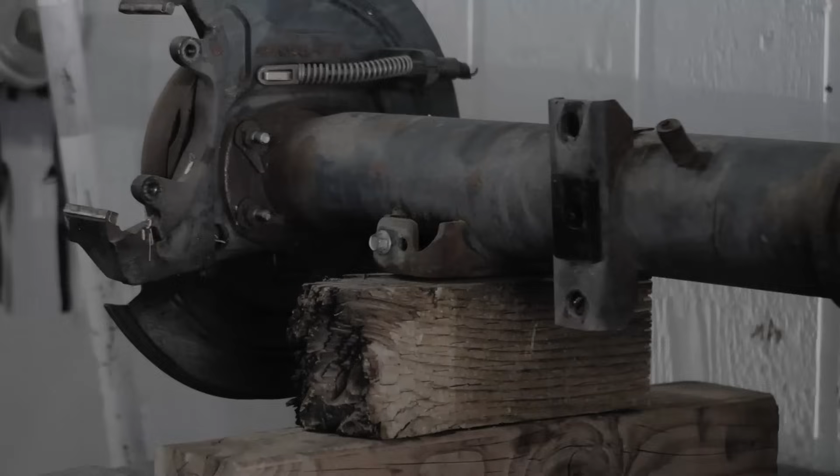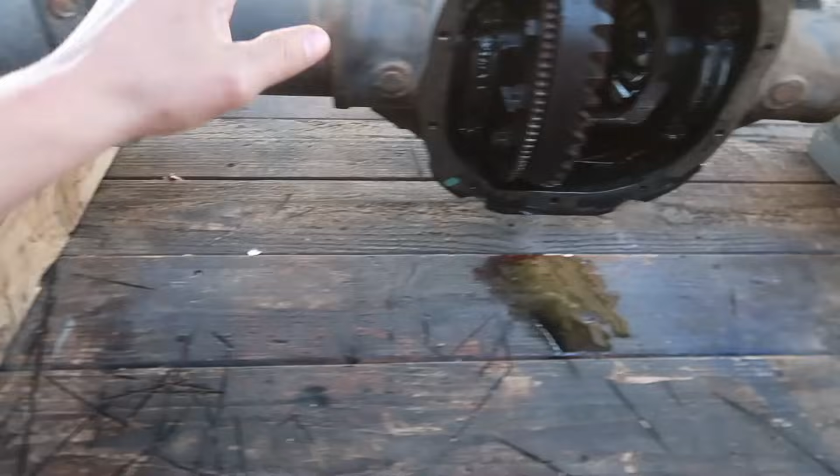Today we're gonna be picking right back up on my Ford 8.8 rear end. We're gonna be actually cutting and shortening this thing today. To start off though, we need to cut everything off of this thing. All of the spring perches and the mounting points for the sway bar, all this stuff has to come off. But before I do anything, I wanna kind of clean this thing up really quick and then we'll get started.

I got this thing as cleaned up as I'm gonna get it for the time being. This thing's gonna get cleaned probably multiple times.

Before we get started, I want to mention that this is my first time ever doing something like this. I've never done ring and pinion work, or taken the internals of one of these out or installed them. I do know that there's shims involved and you have to check clearances, put paint on the teeth, spin it and check the engagement and the amount of engagement. There's a lot involved. That's something I've never done before.

So for that reason, I am going to be leaving all of this assembled. Of course, if you are doing this to your rear axle and watching this video to learn something from me, and you're confident enough in removing this and knowing you'd be able to put it back in properly, then you can do so. Because I feel like that would probably be the best thing to do, is to just get all this stuff out of the way, since we have a lot of cutting, grinding, and welding to do.

And of course, you are gonna get debris and fragments of metal inside of the axle tubes and everything, and that's gonna have to be cleaned out after we're done. To get all these moving parts out of the way would be better, but me personally, I don't wanna open up a can of worms that I'm not gonna be able to get myself out of, you know what I'm saying? So I'm gonna leave all that in there, but I will most certainly be cleaning this thing once again, inside and out, once we're all done, because I wanna get all the crap out of the inside, and we're also gonna paint it.

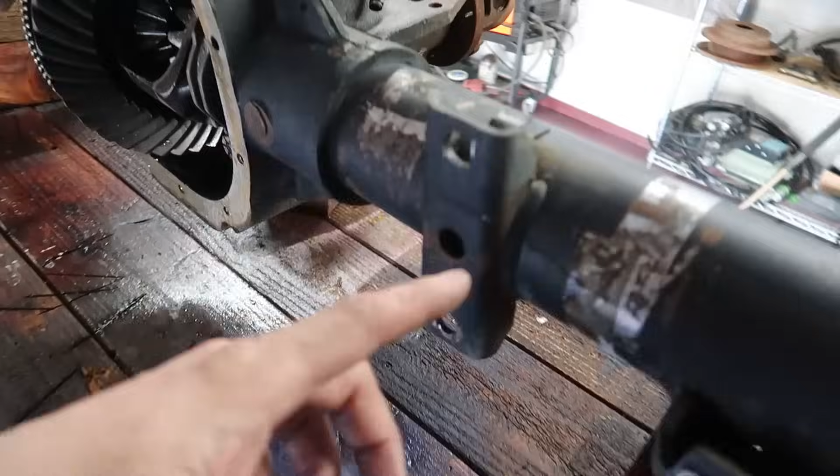So with that disclaimer, moving on, what we need to do is actually cut everything off of these axle tubes. The spring perches need to go, and these mounts right here where the stock sway bar bolted up need to go. I am going to leave these little tabs for the brake lines because I'd like to reuse those.

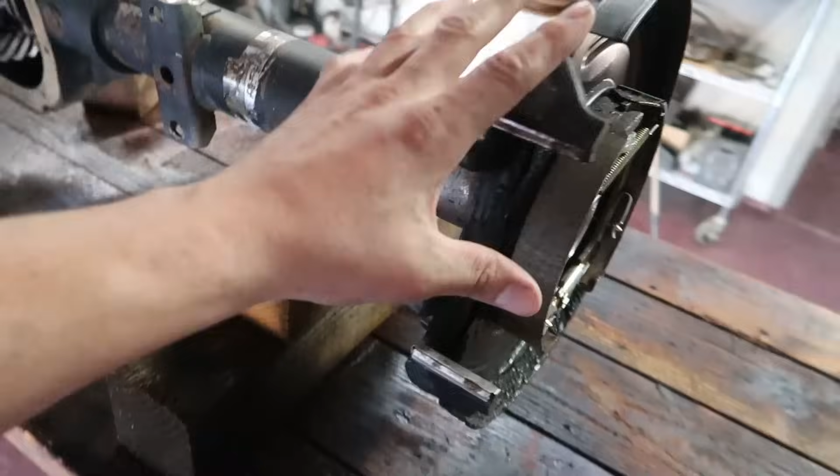First, we're gonna go ahead and unbolt this stuff and get it out of our way. I left it on there for the pressure washing, so it got clean too. But now I can go ahead and get that stuff out of the way.

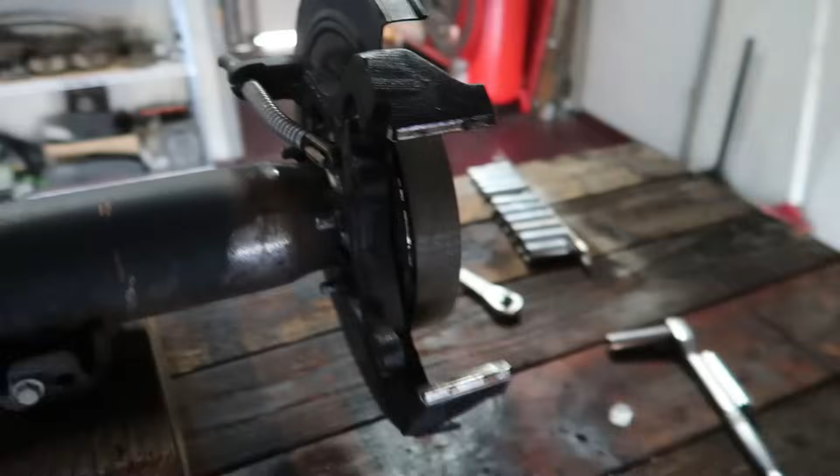So this is the driver's side. I am gonna go ahead and mark this stuff so later it saves me a little bit of confusion. I'm sure it'd be easy to figure out, but later on, instead of trying to figure it out, I just know passenger side, driver's side. It's as easy as marking it.

So these things, it looks to me like they're through bolted. There's 4 bolts right here. There's a head on this side, and then there's a nut on this side.

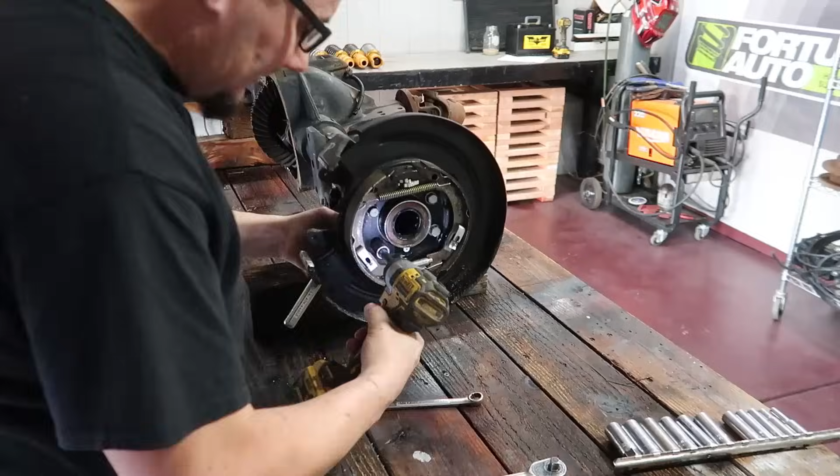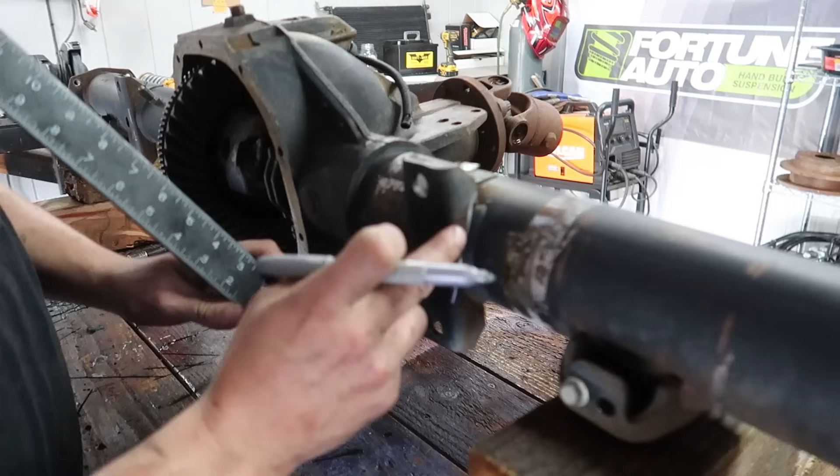When it comes to cutting these brackets off, obviously our cutting wheel cannot cut in a circle. So what I'm gonna be doing is just making a bunch of straight cuts, basically in a V. I'm gonna try my hardest to stay away from the axle tube itself, because we don't wanna create dips in it or cut into it. We just wanna take these brackets off. Once we get the majority of this bulk cut away, I can come back and whatever's left, along with the weld, I can just grind down with a flap disc and get it all nice and smooth. However you get these off, the most important part is just to keep your cutoff wheel out of your axle tube.

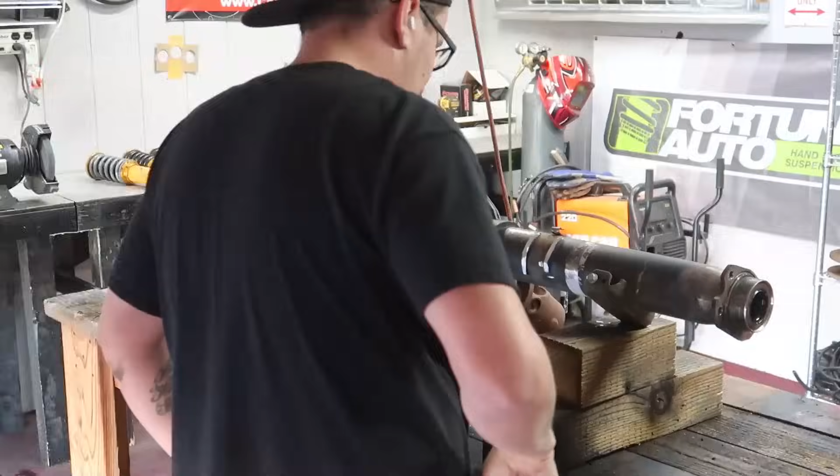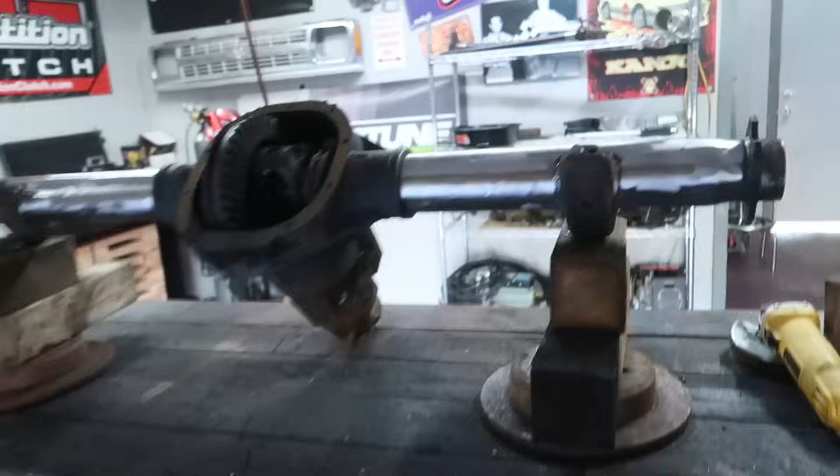Good Lord, man. My whole garage is completely filled with grinding dust already, and that was only 2 of the 4 brackets. We're halfway done. Sway bar brackets are cut off.

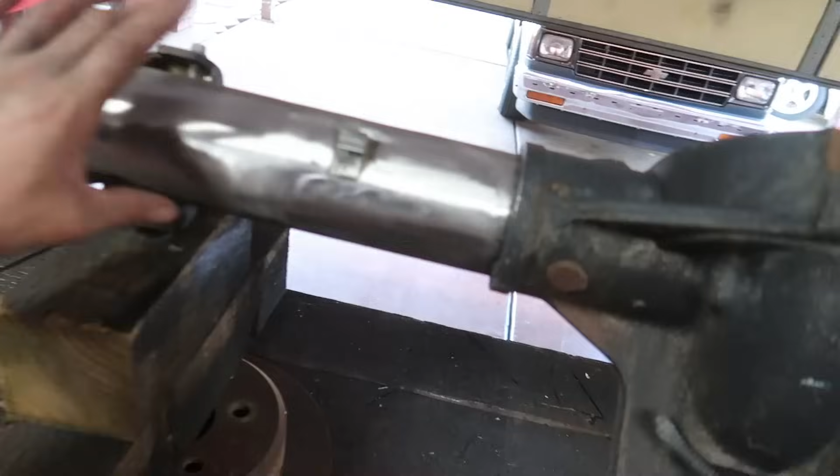I went ahead and ground the excess metal all the way down to where it's smooth and stripped all the paint off. I did everywhere that I can see with the axle in this position, front and back. So got all the paint and everything off because we are gonna need a weld on this. We need to strip all that down.

So now I need to go ahead and roll this thing over the other way and do the exact same thing with our axle, and then just finish getting all this paint ground off, and we can move on to the next step.

Finally got us a whiteboard for the damn garage so I can stop drawing little pictures on pieces of paper. This thing was 10 bucks at Walmart.

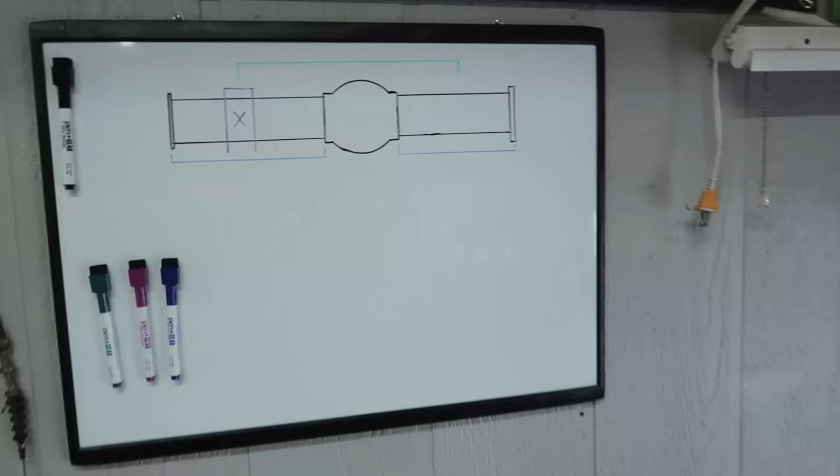Anyhow, I went ahead and I drew a rear housing up here, and these are all the measurements that we need to figure out. So the blue line, this purple right here, and then the green - I separated everything in different colors, bro. Trying to stay organized around here.

What can I say? So we need to find the measurement of the short tube versus the long tube so we can find out how much we have to cut out.

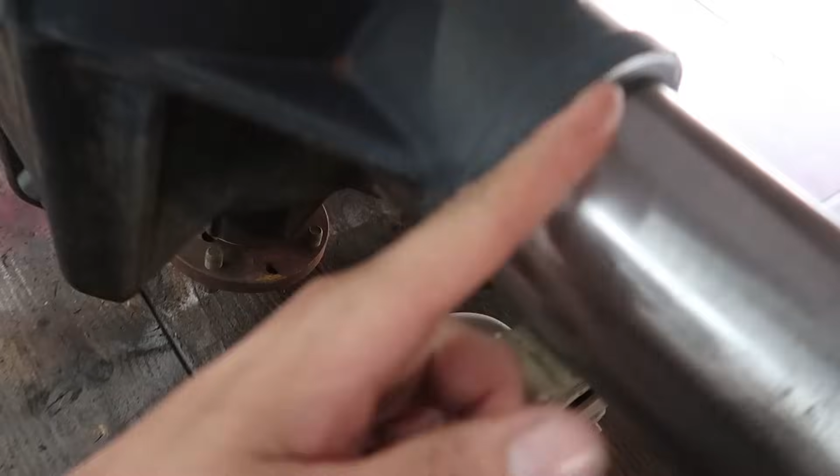And whenever I measure this, I'm gonna be going from this lip right here of the differential housing, from here to the outside lip of this. So this area right here is actually machined flat because this is where your brakes and everything all bolts up. So this front side of this is actually machined.

The back side of it isn't necessarily machined. So it is a possibility that if you pull your measurements from this housing over to here, they could be slightly off from one side to the other. So you want to measure off the machined surface for sure.

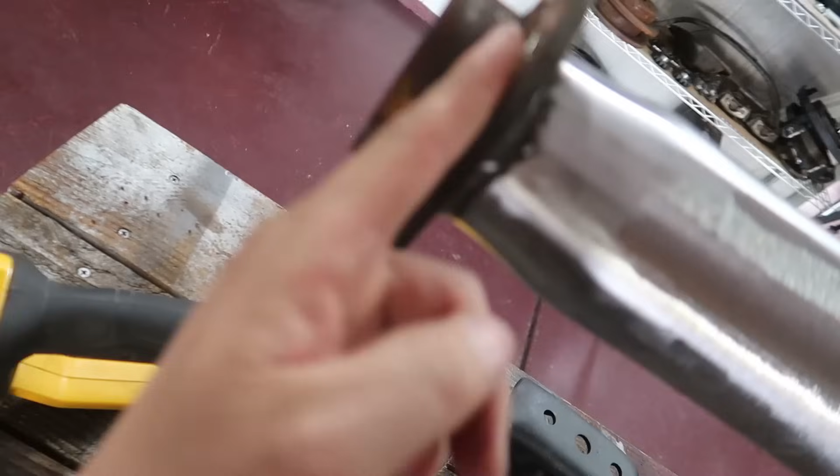We got to pull a measurement of the short side and a measurement of the long side. Subtract the measurement of the short side from the long side, and what we have remaining, that is our measurement in which we have to actually cut out of the long side. So once we figure out these two measurements, subtract them, we will get the measurement that we need to cut out. Now the position of where it is we are going to cut is going to depend on this measurement up here.

So this green line right here is going to represent the spring perch. And in order to get that measurement, I'm gonna have to pull it off of the axle that is actually on the Blazer. We have to find out where our spring perches are going to have to mount in order to match with the Blazer, because this is going into the Blazer.

We want our leaf springs to line up, right? So stay with me, pay attention. I'm gonna do a really quick crude drawing just to kind of represent what it is I'm trying to explain.

So whenever we cut our long tube and take a section out, right? Once we cut that section out, then we gotta bump the two together and then re-weld it back together. So basically, once we do so, they're gonna be bumped up to one another like this.

We want to find where our spring perch is gonna be centered on the axle tube so that we are capable of welding our spring perch to where that weld of the axle tube is going to be in the center. And if it's not obvious, the reason why we're gonna do that is for strength.

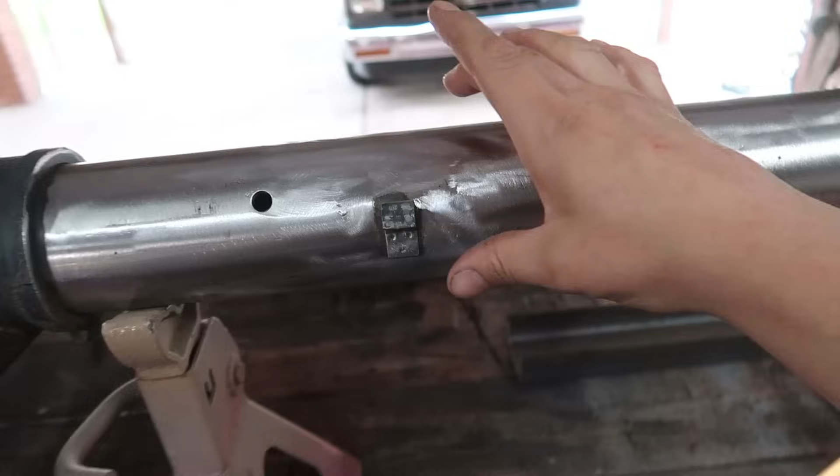So whenever I cut this tube and I weld the two pieces together, I'm gonna have a weld going across here. And then if I take my axle perch and put it centered over the top of that, then we have to weld this in, and then our axle perch will be welding on each side of it, just adding a little bit of strength, adding a little bit of rigidity to the section that we welded together.

Measuring the short side, butting up against the differential housing to this outside machined edge: 17 3/8. And I'm gonna check it in a few different spots just to make sure.

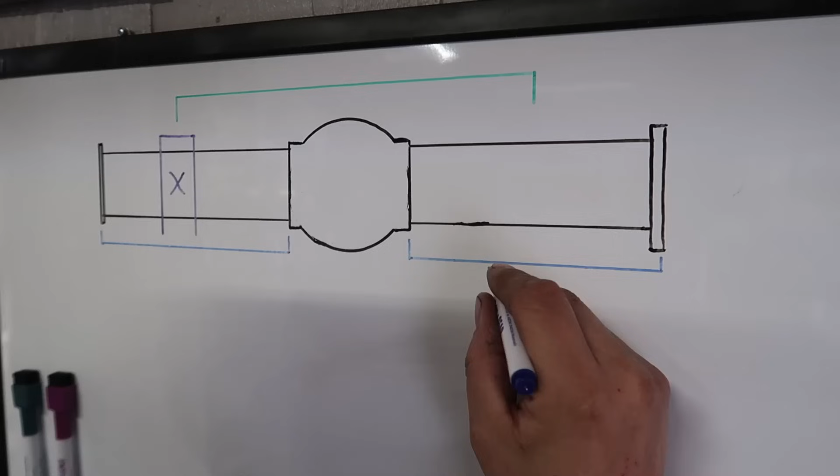All right, same thing on the long side. Measure from the machine edge right here of the differential housing to this outside edge is 20 1/4, and I'm gonna check in a few spots. Yep.

So the amount that we need to cut out is the long tube minus the short tube, which is 2 7/8 of an inch. That is the amount that we need to cut out of the long tube.

So now we know how much we gotta cut out, but we don't know exactly where we gotta cut it. And that's where I gotta go and get underneath the damn Blazer and figure that one out.

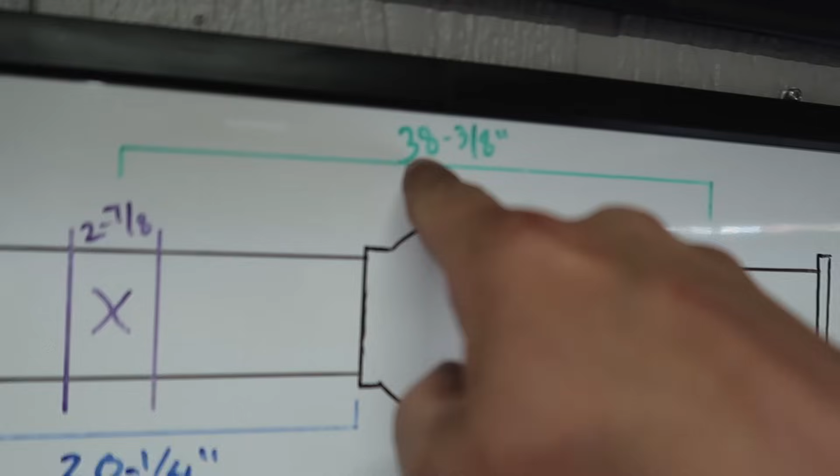38 3/8 of an inch. Just to explain, I'm trying to be as informative as I can, so if any of you are wanting to do this yourself, or just watching to get some ideas. This measurement, the 38 3/8 of an inch, is the measurement of my spring perches that are on the axle currently on the Blazer.

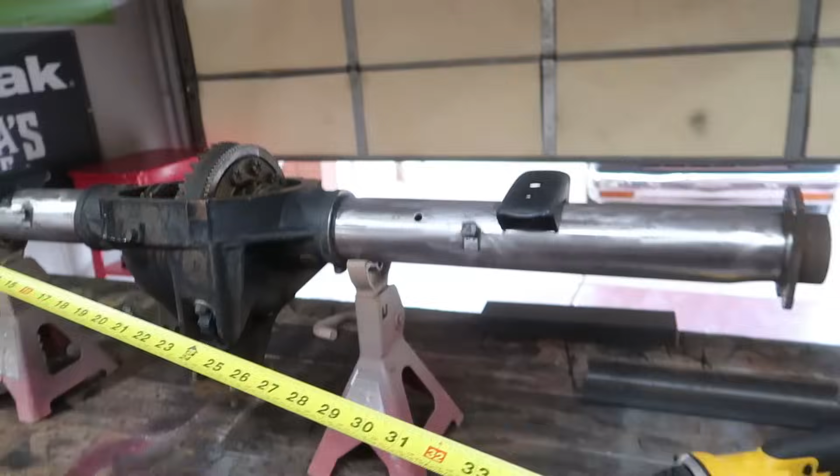That is from one spring perch to the other, center to center. Currently I cannot get a dead on measurement, so that's a rough measurement. You can't measure something with a big old hump right in the center, you know what I mean? But since that axle is still installed on the Blazer, I was able to pull my measurement off the leaf spring, which had been further out like this.

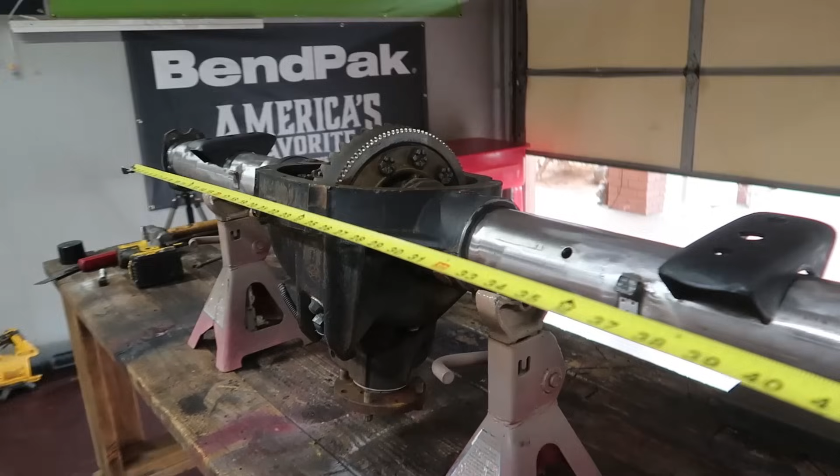So that is not an exact measurement, exact enough to know exactly where to weld my new spring perches on the 8.8 axle. So I will need to remeasure that whenever we actually take that axle out of the Blazer. We'll get a more precise measurement before we weld these on, but that's good enough for figuring out exactly where to place my cut.

Meaning if I am off a little bit from center to center, my weld might not be dead on in the center of my spring perch. It might be 1/4 of an inch this way or that way, but either way our weld will be in the middle of our spring perch, whether it's perfectly centered or not.

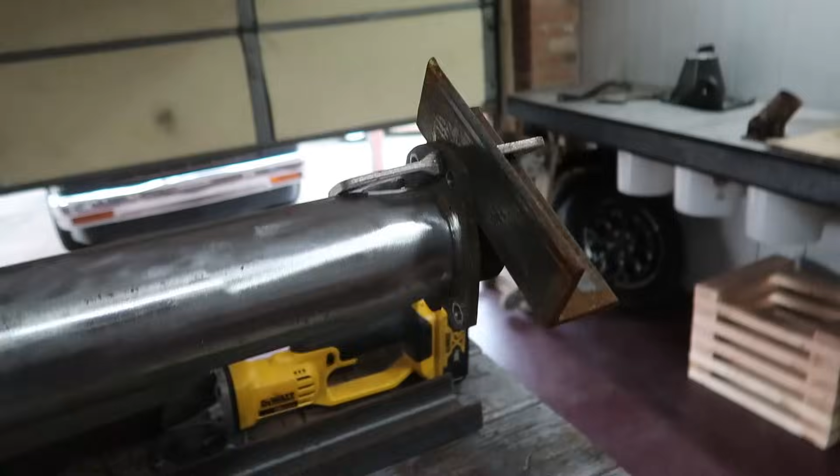But now we need to figure out exactly where 38 3/8 of an inch lands on the axle. So I need to know an overall measurement of the axle the way it is right now. So I clamped some angle iron onto our flat machine surfaces on the end caps, so I can pull a measurement a little further out and get away from the center diff.

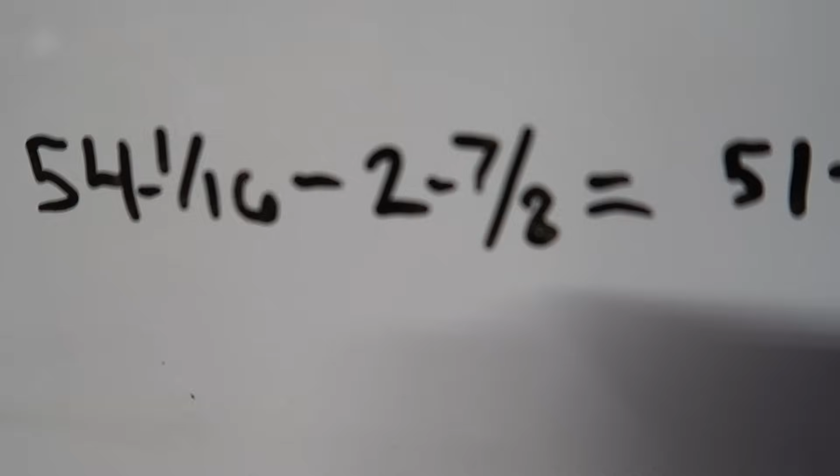The overall width of our axle right now is 54 inches and 1/16. I'm not gonna worry about that 1/16 too terribly much, but we know that we have to take 2 7/8 of an inch out of this. So this measurement is gonna get 2 7/8 of an inch shorter than what it is now. Our overall length right now is 54 1/16.

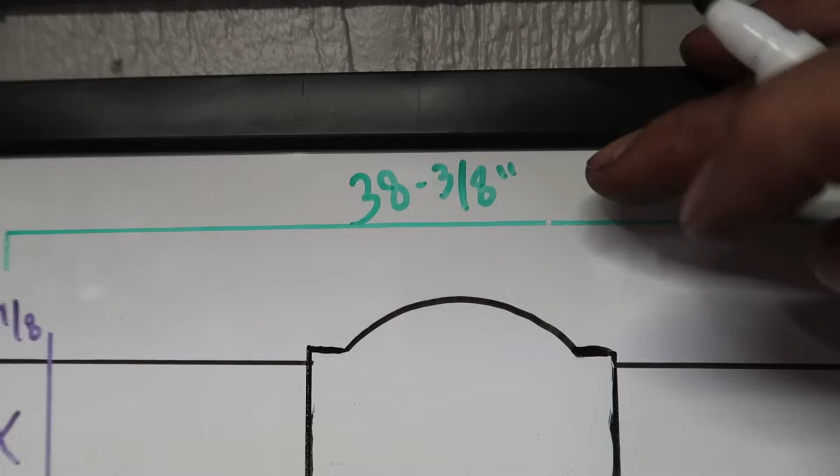We gotta take 2 7/8 out of it, which will leave our overall length 51 3/16. Bring that 51 3/16 down, minus the 38 3/8, which is the overall span of our spring perches. 38 3/8 equals 12 13/16. So of the axle's overall length, the axle itself from this end to this end, minus the overall length of our spring perches, is the 12 13/16.

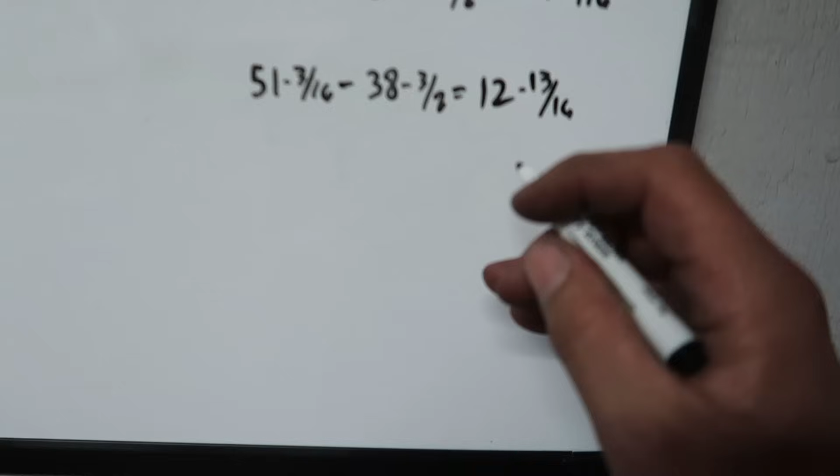So 12 13/16 is what we're left with. Now we gotta cut that number in half. I know, it's a lot of math. So what we're left with is the 12 13/16. That divided by 2 is going to leave us with 6 13/32nds, bro. Yeah, that's a wild number, right?

So now I can simply go over there to the axle, measure from this edge over 6 13/32nds of an inch, and that is the center of our spring perch, or where we make our first line where we have to cut. So I went around the axle tube and marked many different points, like 5 or 6 different points right at 6 13/32nds, to make sure I have a reference point going all the way around, because this is actually our cut line.

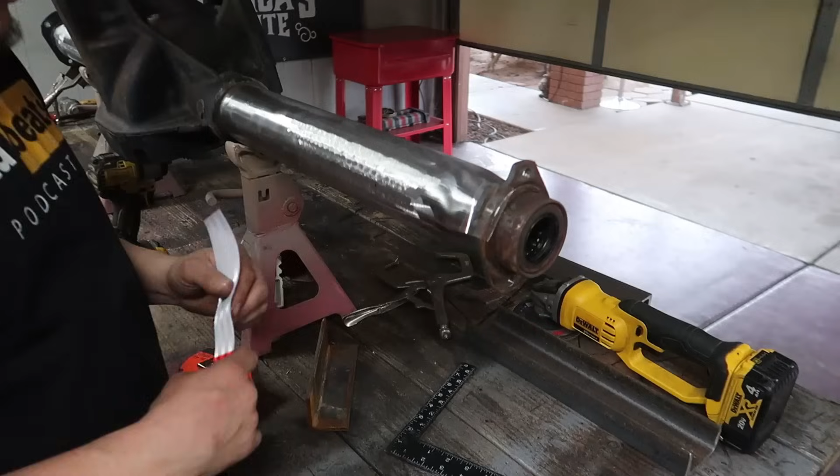So now what I'm doing, this is a reflective sticker for a trailer, man, it's really thick. I'm gonna wrap it around the tube, and you gotta make sure your edges line up so you know this thing is square going around the tube, and then you know you have a nice straight line going around. But I also made multiple marks so I can go around and check that I'm hitting all my marks.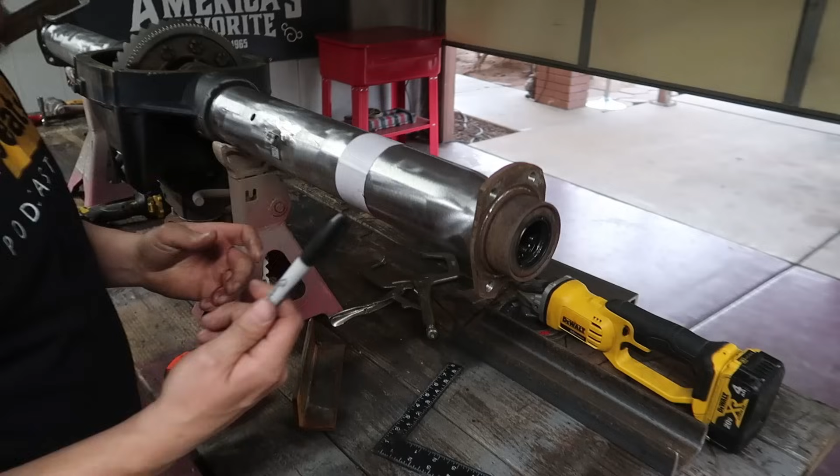On the freaking money there, boy! Every single one of our marks are lining up. So now I'm just gonna go ahead and drag my Sharpie around that edge, leaving our cut line, and I know it's nice and straight and square, and it is 6 7/32 away from this flat surface right here.

So now we got our first cut line marked. I'm gonna go ahead and slide this thing over. Since I already have this thing all squared up with the pipe, I'm just gonna slide it over here out of my way. We need to make our second mark and do the exact same thing, which is just gonna be the 2 7/8 of an inch over from the first mark.

So there's both of our cut lines, bro. That is exactly 2 7/8 right there that we need to cut out. And when we do, and we butt this section up to this section, weld them together, that will also roughly be the center of where we need to weld our spring perch on.

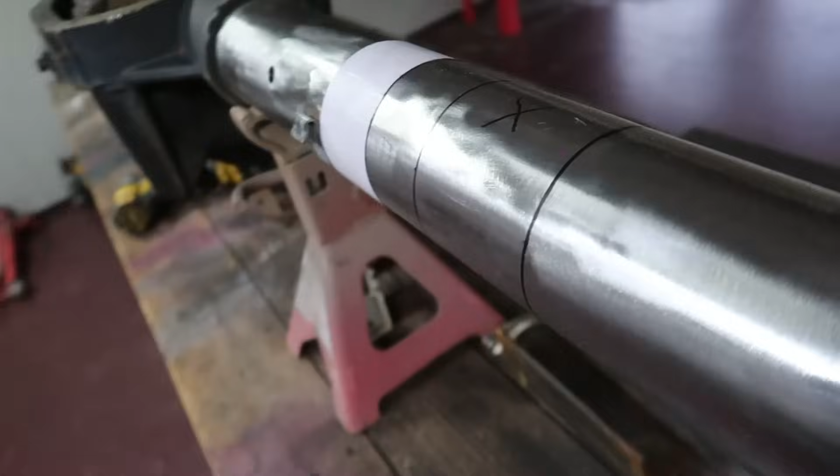So now I'm gonna go ahead and pull a bunch of measurements, dude. I'm gonna measure this at least 2 more times, double checking the lines before I do any cutting. Because the thing is, if I screw this up, if I make this too short, then it's screwed up, and basically the whole thing is just trash. I mean, I could try to get the plug welds out and everything and try to replace the entire tube, but you get what I'm saying. I don't want to screw up.

Wait! Before we do any cutting, we need to actually give ourselves a clocking reference. So I need to put a line across here so I know which way to clock this thing whenever we weld it back on.

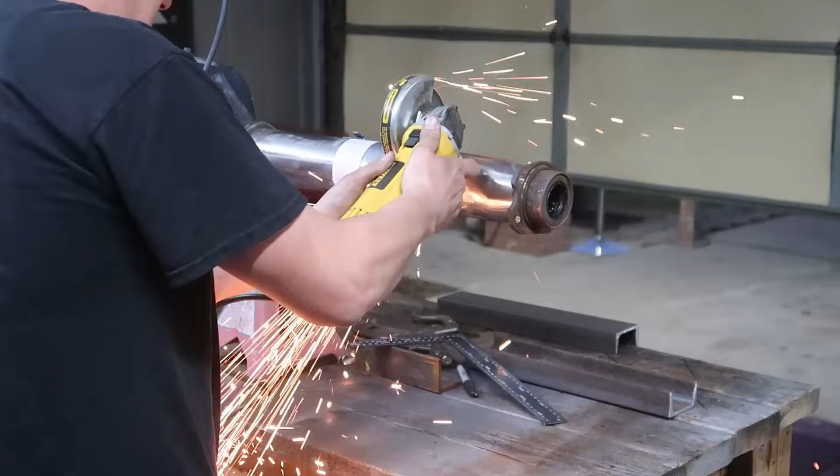First cut done, one more cut to go. Dude, the inside of this is disgusting, bro. Got a lot of cleaning before we're gonna be able to do any kind of welding.

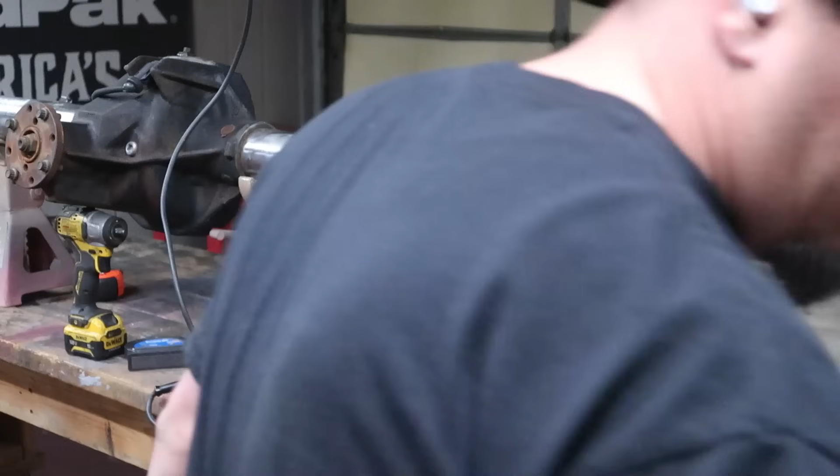What I got here is 3-inch C-channel, and they are 14 inches long in length. This is what we are going to be using to square the pipe up before we weld it together.

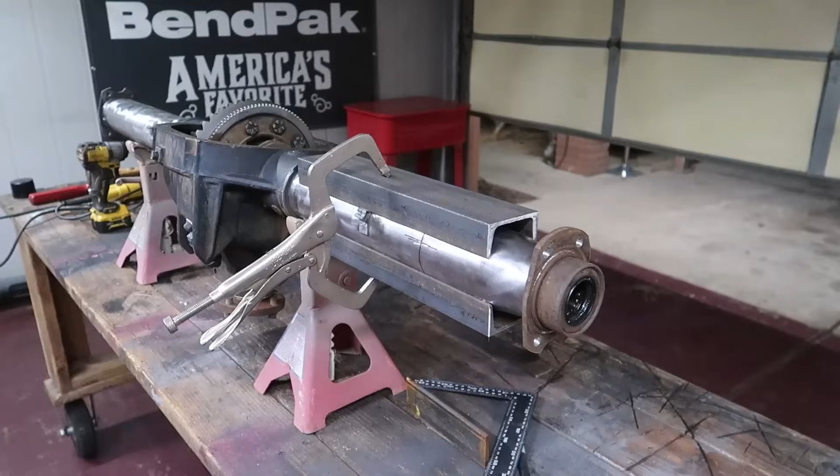Shoo! Shoo! Shoo! Dude, that is so freaking dope, man. This is actually really exciting for me. This is my first time ever doing something like this to this extent, you know? Like, I don't know, it might seem really simple to most people, but it is a pretty big undertaking, man.

And to accomplish something like this, now of course we're still not done. The most important thing I would imagine is probably making sure that I don't weld some camber or something into my rear end. Make sure it's nice and straight, but I don't know. I'm just taking my time, one little step at a time, bro.

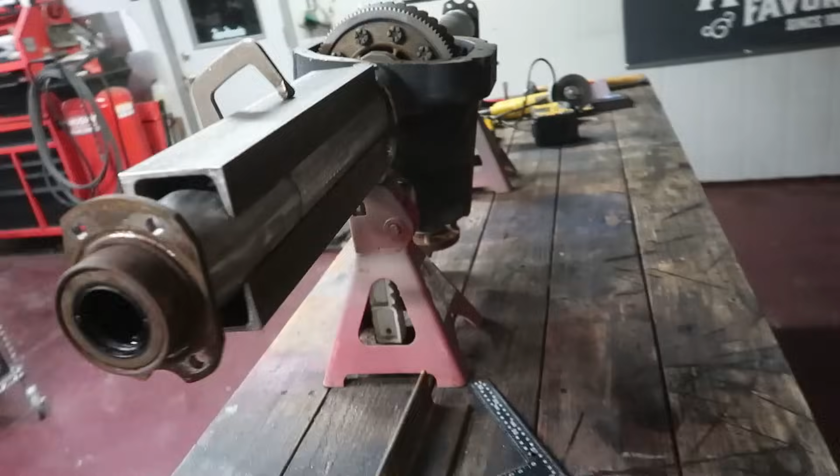I've done tons of research on this to try to make sure to the best of my ability that this is gonna come out right. But I just kind of wanted to mock it up there and just get a visual of how it looks. I measured it and it is roughly in the neighborhood where we need to be at 17 3/8 to match that side. Of course, we do have to clean the cut up a little bit.

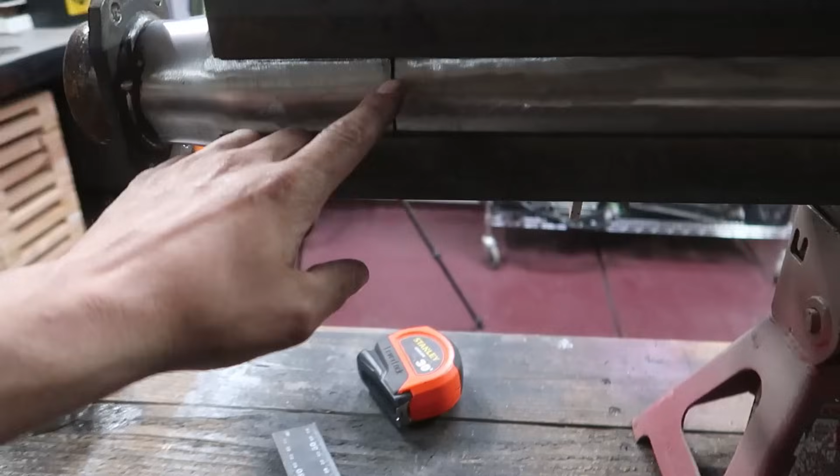I followed that line extremely straight as I could. We need to clean it up a little bit, make sure to get it flush, bevel that edge.

But first things first is, dude, the inside of this tube is ridiculously dirty. Like, this thing is caked up. So we're most certainly gonna have to get that clean before we can do any kind of welding on this for sure. And I want to do it before we start beveling the edge because I don't want my grinder to just start contaminating the whole thing with grease.

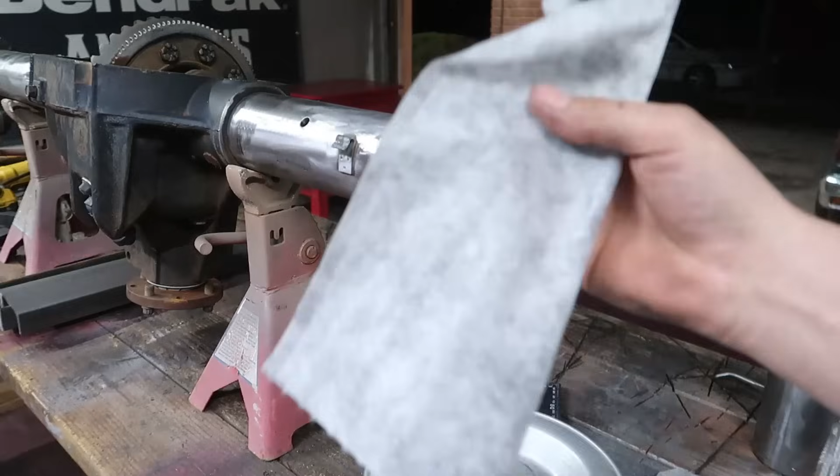So, man, I gotta be honest with you guys, I'm not really wanting to pressure wash this thing all out and get all crazy with it again right freaking now. So I'm just gonna try my best to get this thing cleaned up by hand. I'm taking a bunch of my Gojo wipes right here. Okay, just gonna kind of fluff them up. This is gonna be my beginning stages of getting this clean.

And I have a set of really long, they're not needle nose - I honestly don't know what these are called, but anyhow, I'm just gonna clamp on to all my Gojo wipes. That's my little swab. We're gonna swab it. Maybe do some spin action while we do so.

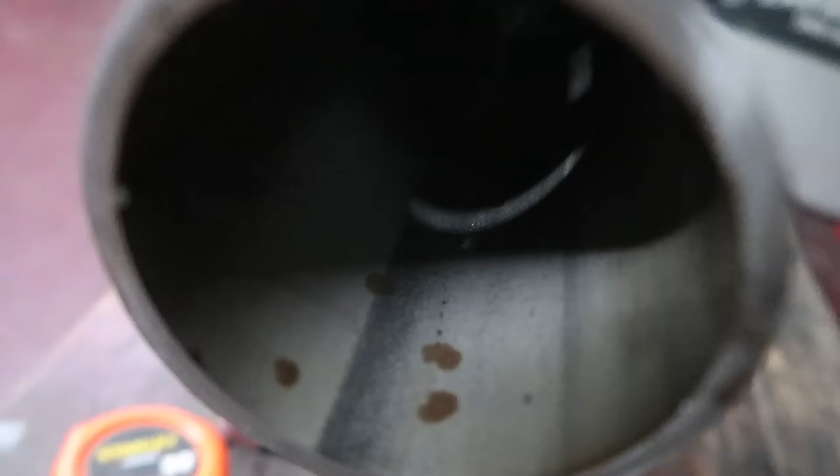Dude, good freaking Lord, man. Freaking look at that. Holy crap. I still have some more cleaning to do, but I'm just surprised.

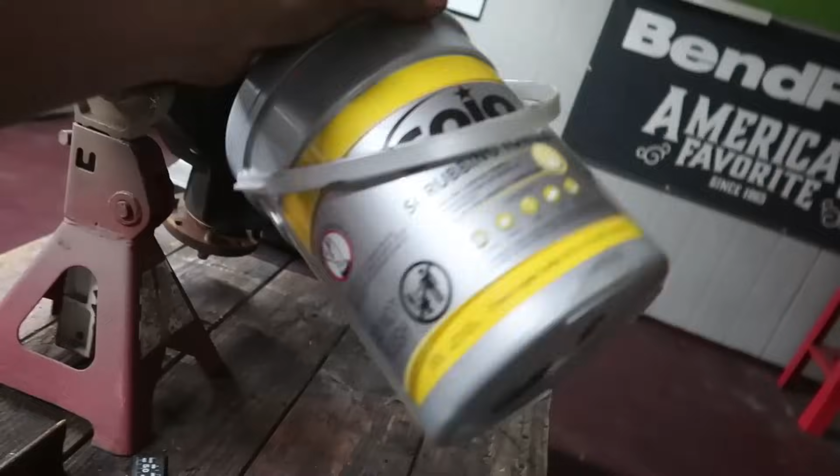That's all the way down to the bare metal. I can't tell you guys enough, if you don't have a tub of these in your garage, you definitely need to get them. Carry them with you to the junkyard or whatever, because these things definitely kick ass. I'm gonna do this once with this round, grab some clean ones and do it one more time, then get a rag of some sort and do the exact same thing with some acetone a couple of times, till we get this thing really, really freaking clean and ready for welding.

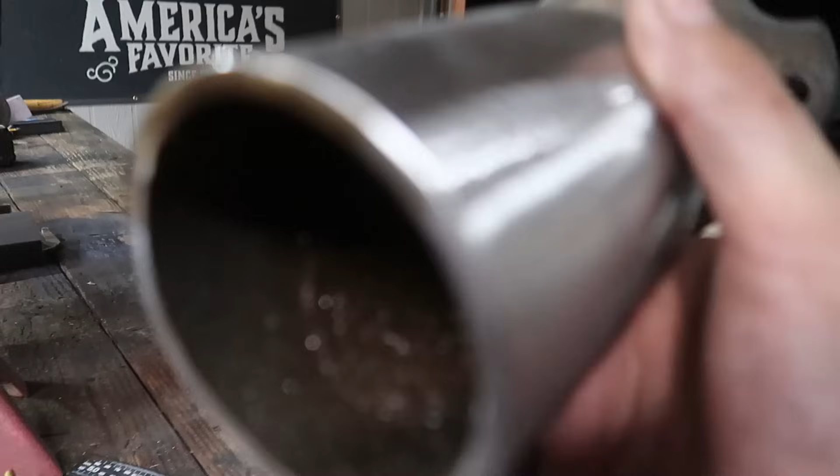Got to do this side as well. Look at how much that's caked up in there. That's what that looked like. Freaking, dude, what is in these Gojo wipes? It's wild.

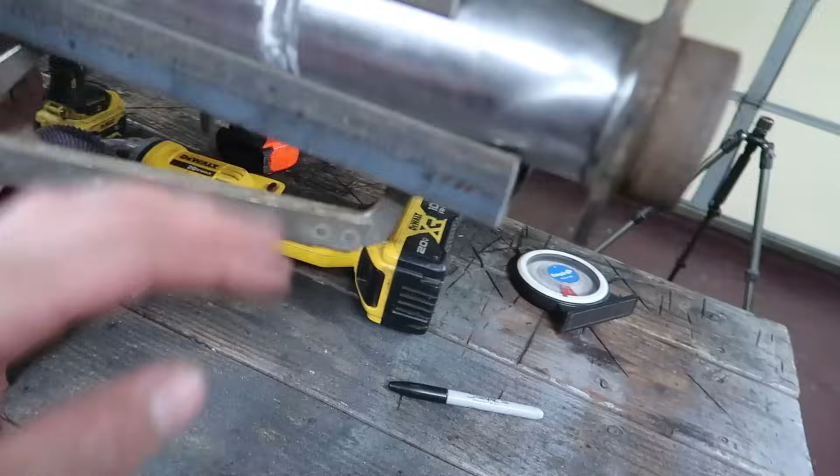There's the setup, man. So I got my C channel back on there, and I went ahead and cleaned all this stuff one more time, and I beveled the living shit out of it. So as you can see, got a nice sized little canyon there that I can fill up with weld.

But the most important part is, are we sitting at 17 1/4? So if I set it up against the housing there and measure the top, I'm sorry, not 17 1/4, 17 3/8. So as you can see.

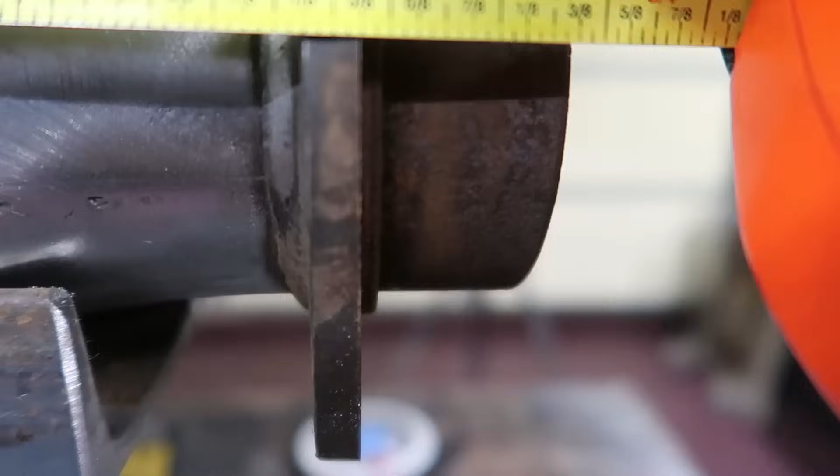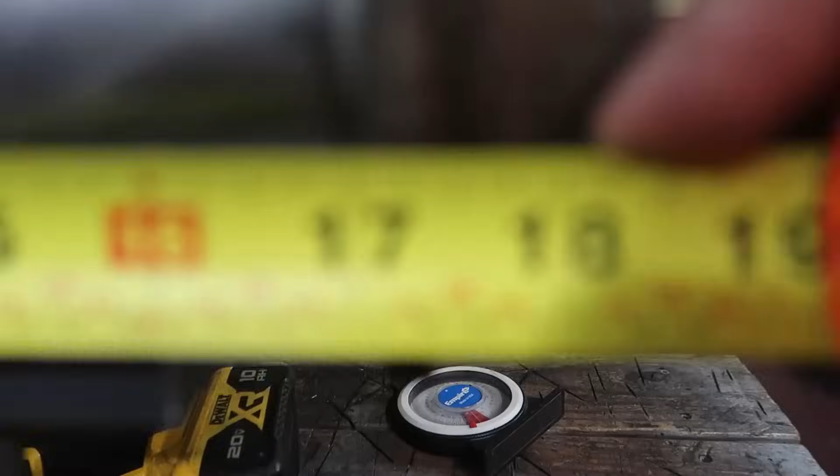17 3/8, can move it to the bottom. So I have another point of reference right here. Focus. Bang, bang, 17 3/8. And then also the C channel on the top, I have butted up against the housing right here, so I can actually pull a measurement from this edge. Coming up here to this edge, measuring over, 17 3/8, bro. Right on the money, boy.

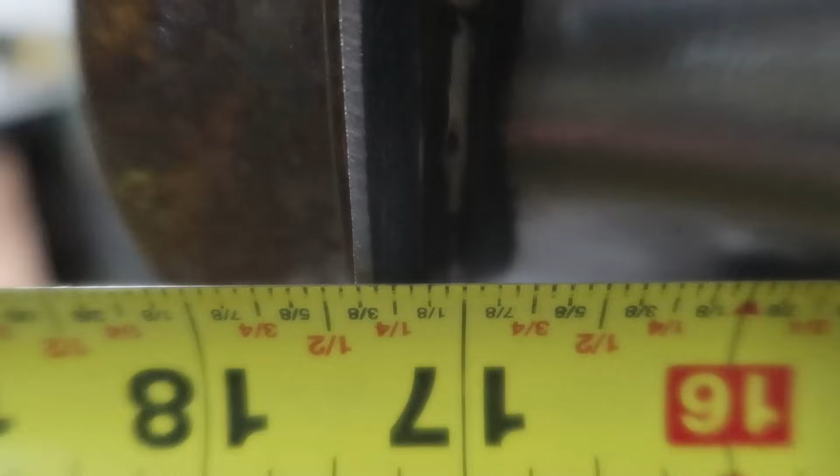Now coming over here to this side, I'm gonna measure from the same 3 points, down as low as I can right here. 17 3/8. Now move up. I am measuring from as many points that I possibly can. 17 3/8, and then the same thing, moving up to the top right here off the edge of my C channel, once again sitting at 17 3/8. So that thing is squared up. It's nice and straight. The measurement is dead on freaking perfect, bro. I'm actually stoked.

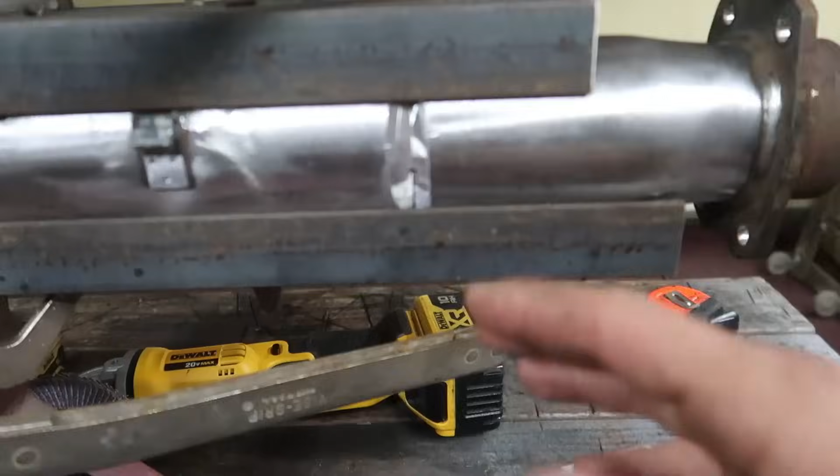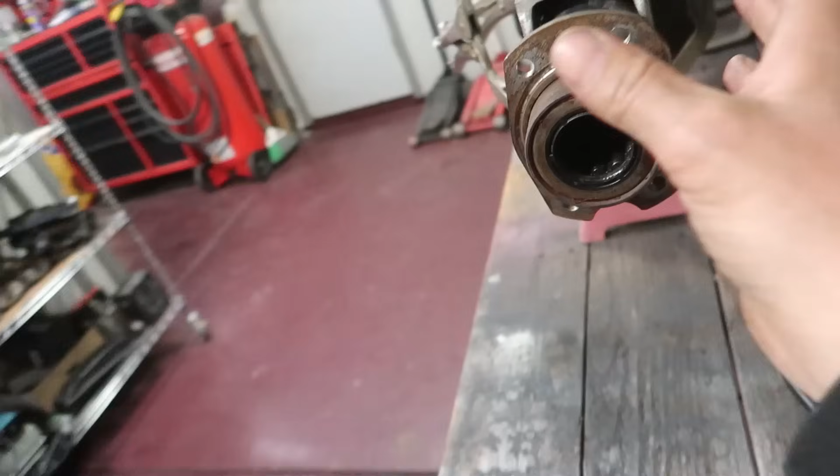Got the edges all beveled, everything is cleaned, this thing is ready to be welded. So what I'm gonna be doing now is putting a tack here and a tack here, and then on the other side the same thing, a tack and a tack. Then we are just gonna completely undo this, and I need to rotate the axle, exposing these sections that are underneath the C channel now, and then I'm gonna reclamp it up, pull all the same exact measurements, make sure everything is dead on perfect, and then do a couple of tacks again.

Fucking cameras were recording the whole time. Ah, damn, I blew the breaker.

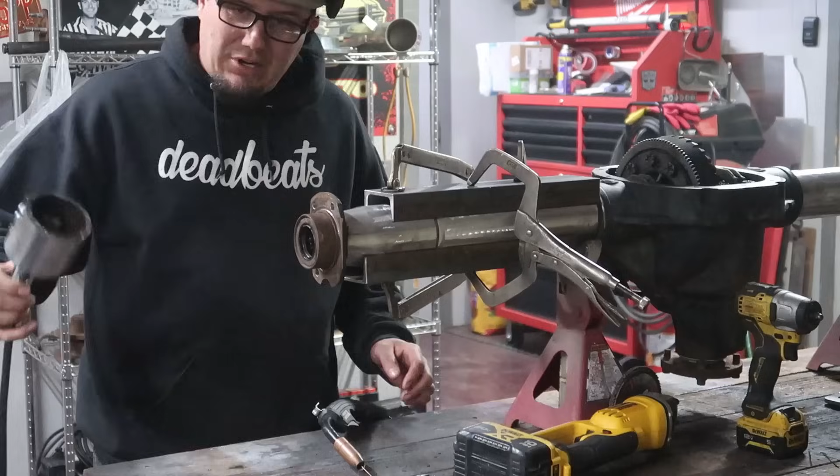I'm trying to get my heat and everything set on this piece of pipe that we cut off, so.

Tacked up in all 4 spots. I went around with the tape measure and checked every single bit of it. Every spot on this is dead on at 17 3/8.

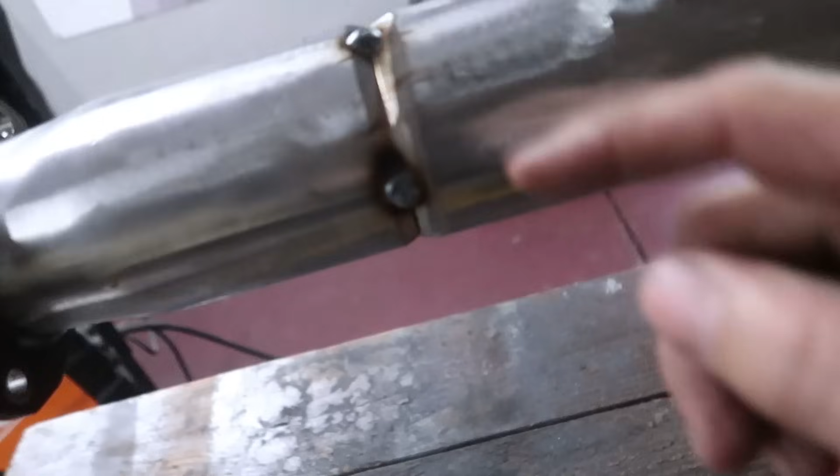So as you guys know, the heat will make it move and do crazy stuff, so I gotta try not to get this as hot as I possibly can. So from tack weld to tack weld, I'm probably just going to weld about halfway, then move to the other side, do halfway, and just keep kind of jumping around. So to actually complete the area in between tack to tack, that's gonna take me twice.

And letting it cool down, I'm gonna do the best that I can. As you guys know, I don't have a whole lot of experience welding, so I'm just gonna take my time, try to get it as hot as I can to penetrate and get a good weld, but at the same time, hopefully not distort this damn thing. So, wish me luck, bro.

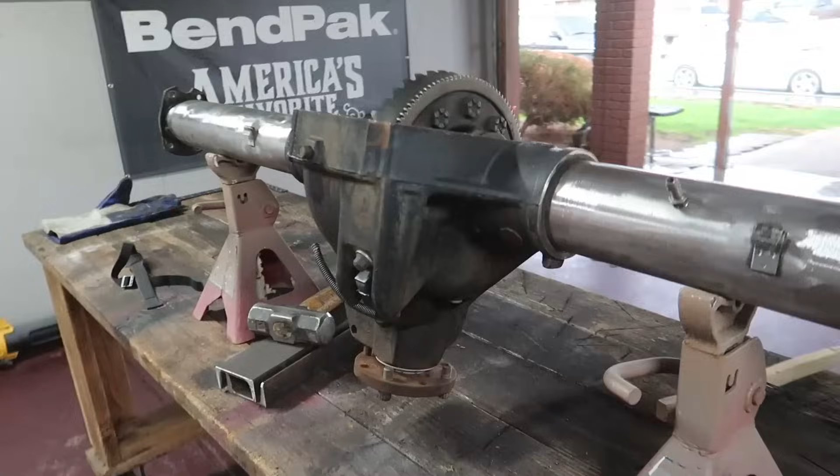Well, there it is, man. We officially have a shortened 8.8 rear end, an equal length rear end, if that's what you want to call it. Either way, got it done, bro. It came out really nice.

I will admit my weld wasn't the prettiest, that's the reason why I didn't necessarily show it off. But it didn't distort from what I can see with a tape measure. Everything is still lining up, it's dead on 17 3/8 all the way around this thing.

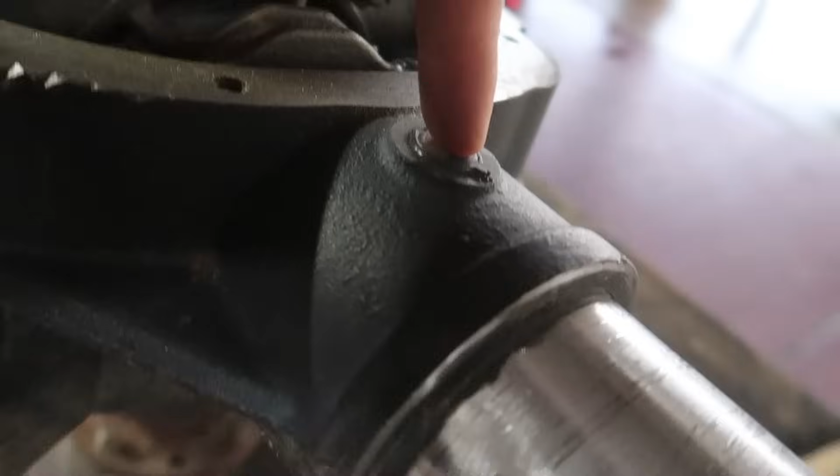There's one more thing that we still need to weld up before I close this video out, right here where the axle tubes actually go into the differential housing. From the factory, these are plug welded right here, and from my understanding, these plug welds have been known to fail on occasion, and you can actually twist your axle tube inside of the housing, which isn't good.

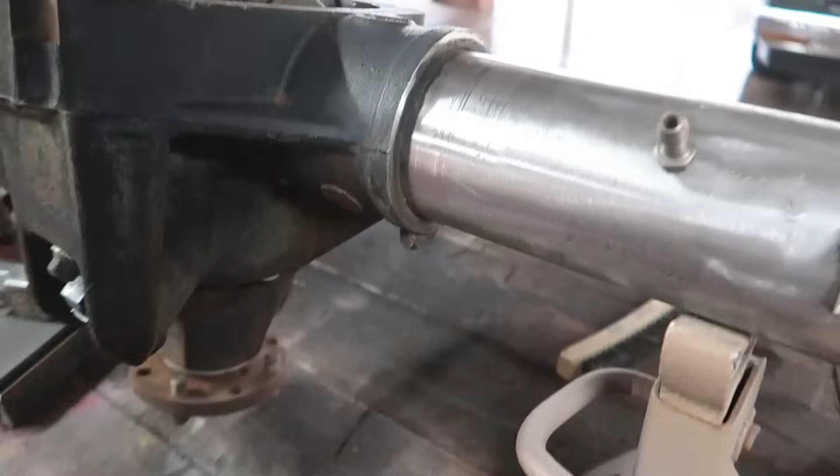It's kind of just a safety precaution, man, just to make sure. It doesn't hurt to be safe rather than sorry. So I'm gonna be taking this wire wheel and going in that little crevice all the way around, gotta strip all the paint out of there. I'm not gonna completely weld this thing all the way out, I'm just gonna do like a half inch weld, in four points all the way around it on both sides.

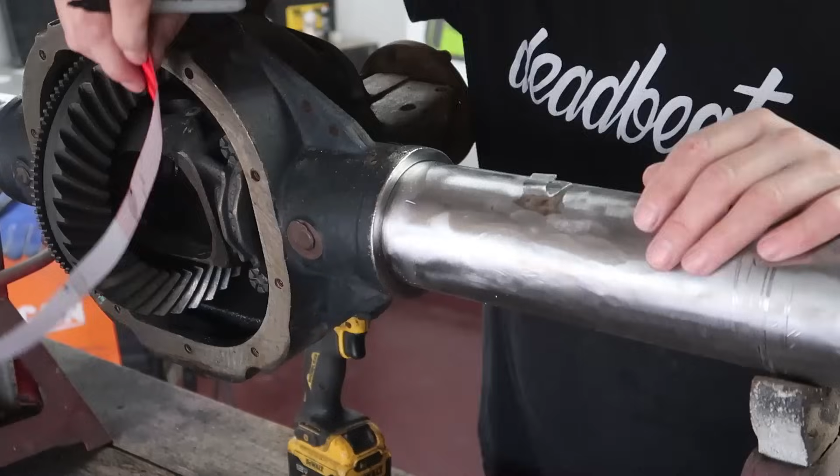Alright, so I'm gonna do 4 welds going around this on each side. I'm taking that same trailer sticker I used before and I wrapped it around the tube. This thing overlaps, get it nice and straight, and at the point it overlaps I marked it on here, so whenever I take it off, that's what this mark is. That means my axle tube is exactly that long. So what I did from there, I folded it in half, made a little pinch mark, and put a Sharpie mark on there.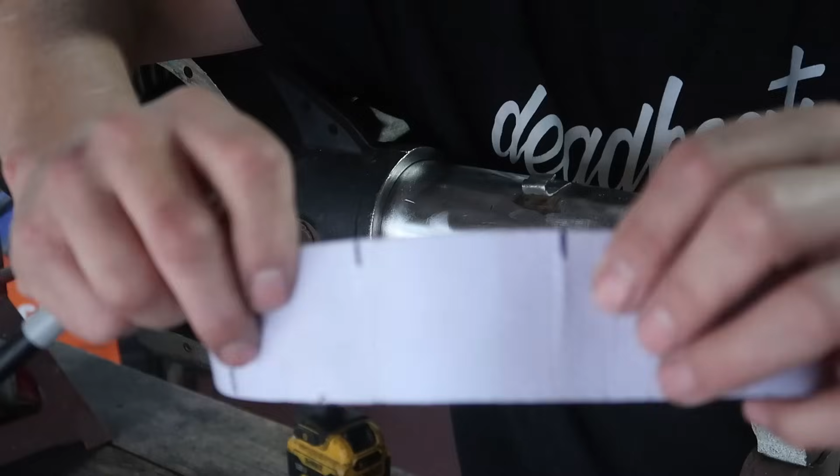And then each half section, you fold those in half again, basically folding this thing into 4 parts and making a little bend in it so I could straighten it out and put a Sharpie mark. So now I have 4 evenly spaced marks on this, so I can wrap it back around the axle tube. I already got the other side done, and I lined the first mark up with this line that's on top in the housing, just so I know both sides are gonna be the same. Really the only reason I'm doing this is so my welds are evenly spaced all the way around, which isn't extremely important, but if you're going for looks, you just want it to look even. That's how you freaking do it.

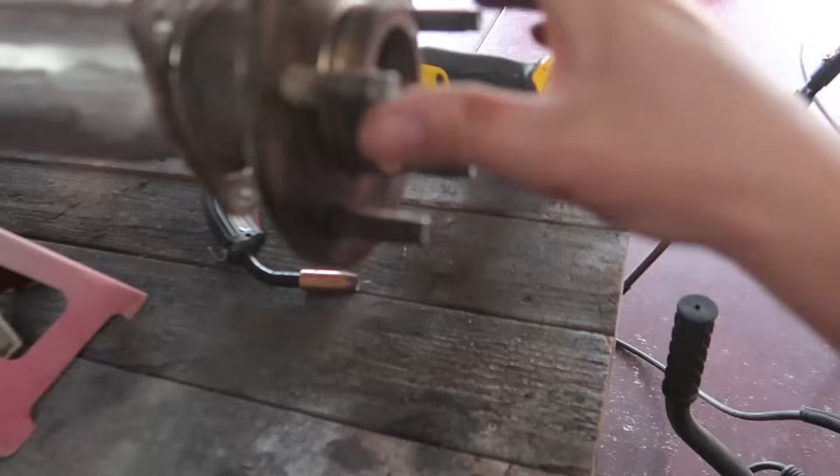So I went ahead and threw the axles back in just to get a feel, to make sure there's an even amount of axle sticking out in here, in which there is. Oh, I just dropped my C-clip. Anyhow, I'm just setting this stuff in here temporarily to make sure everything still lines up and fits.

But of course it's nowhere near time to actually assemble this thing, I need to completely clean this out. I'm also kind of struggling to find C-clip eliminators utilizing the factory axles. I can find a lot of them online, but most of what I'm looking at is for aftermarket axles, so I'm gonna need to call down to one of these distributors and actually get somebody on the phone to make sure I'm getting the right thing.

But anyhow, we also still need to weld our leaf spring perches on, but we need to get that rear end out of the Blazer first so I can get a precise measurement of where we need to weld these things on. This is also an open diff 8.8, it's a non-LSD. I do have something on the way for fixing that, so hopefully, fingers crossed, I'll have everything we need in the next video.

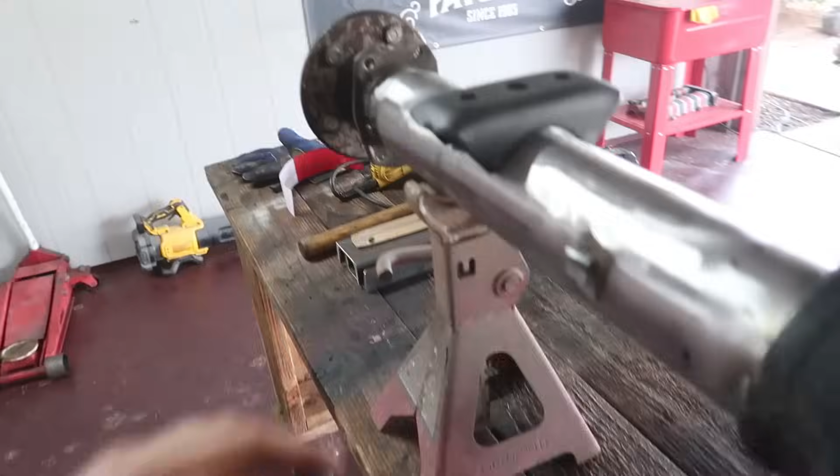We're gonna get this thing completely done, completely welded, we gotta paint it and get it installed. But for now, that's all for this video. I hope you guys enjoyed it, I hope this helped you if you were watching this to get an idea how to shorten an 8.8 for yourself or any other axle. I'm sure this pretty much covers the process for shortening, for the most part, any axle, right?